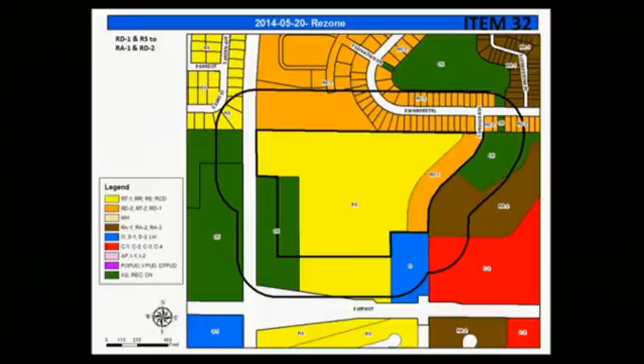Good evening, I'm Mike Cooper with City Planning and Building Services. This item tonight is brought to us by Brady Hyde, representing Whisper Ridge South Development as the applicant. The property is located on the north side of East 69th Street and west of Southeastern Avenue. The site is approximately 26 acres in size. The purpose of the rezoning is to construct a combination of multifamily, townhomes, and twin homes on this property. This is actually an update of current zoning that was approved in about 2005 by a previous owner of this property. Recently, the City Council approved zoning along the north side of 69th Street for a multifamily development. As part of that discussion, we brought in this property owner to make sure that these zoning changes and land use developments were being done concurrently.

Tonight we have a recommendation for you that came from the Planning Commission hearing. As we've discussed this with the applicant, we had some good input, not only at the Planning Commission meeting, but also with city staff from existing twin home owners on the north side of this proposed rezoning. We have a good representation here tonight of those folks. If I could summarize the issues we've talked with those neighbors about, that we've tried to address with this proposed rezoning: number one was concern about families coming into this new development area with a higher density, that there may be a need for a separate playground area, and the developer has agreed to provide a playground development as part of their proposed rezoning.

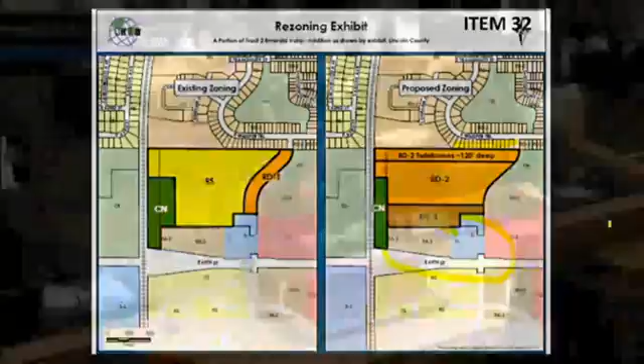My name is Rosemary Murphy, and I'm a homeowner at Whisper Ridge. I know you all have a tough job here tonight, and I do appreciate your service. But please keep in mind the homeowners of Whisper Ridge in making your decision tonight. We all made decisions to purchase our homes based on the current zoning at the time, which was single-family homes and twin homes. We all made our decision to do that based on the zoning at the time of the property that was adjacent to our property. So I just want you to keep that in mind.

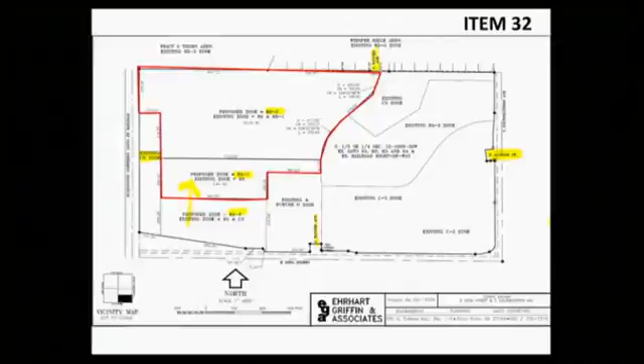Okay, thank you. Councilor Erickson. Sorry, one last little question. I think we need a little map or something. The RD2, I know you told Councilor Jameson what it could be, what his plan is to be for that development. What else could it be? His plan is to do this, but as we know, things change. So what else could it potentially be? The RD2 would allow up to a maximum of 8-unit townhomes, up to 8-unit townhome buildings. Thank you, I ask every time because I can't keep it all straight. Good question.

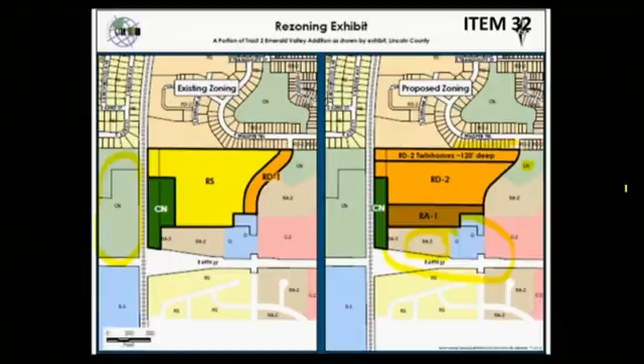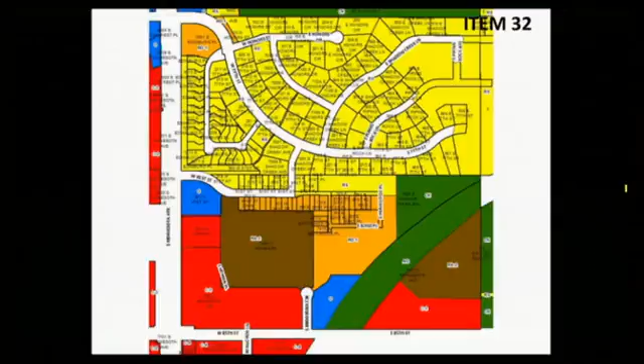Would anybody be willing to make a motion? Move to approve, Erpenbach. I'll second, Rolfing. Councilor Erpenbach has made a motion to approve this item, second by Councilor Rolfing. There's been really good discussion, good questions. A roll call vote, please. Councilmember Staggers? Yes. Anderson? Yes. Erickson? Yes. Erpenbach? Yes. Jameson? Yes. Karski? Yes. Kiley? Yes. Rolfing? Yes. That passed 8-0.

Thank you. Item 33. Item 33 is a second reading, an ordinance of the City of Sioux Falls, South Dakota, amending the Code of Ordinances of the city by revising planning and zoning application fees. Planning Commission recommends approval. Tonight we have 2 ordinance requests being brought to you by city staff, looking at updating some of our fees. The first ordinance is the zoning division. A number of these fees have not been increased since the 1990s, and there's a couple new ones that we're asking to be put in place. One of the big ones that we deal with are temporary signs, or portable signs. We're asking that fee to be increased by $5 to $25. Floodplain development variances, we have tried to be very restrictive on floodplain variances, but when they do come to us, there's a number of engineering requirements.

We have been working with FEMA to try to limit as much as possible floodplain variances. So we're putting a big number on there to really discourage those, and if it can be justified with engineering requirements, and if it can meet FEMA requirements, then we would consider it.

The manufactured home placement trip charge is similar to what we have in our building code. When we do an inspection for a mobile home placement and it doesn't meet the requirements, we have to come back for a second or third trip. It's just another fee we'd like to add to discourage that, to encourage compliance the first time around. We have a fee like that now for our building code inspection.

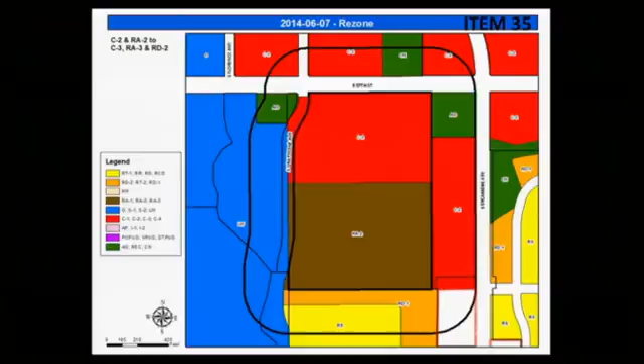Item 35 is a second reading of an ordinance of the City of Sioux Falls, South Dakota, rezoning property at the southwest corner of East 57th Street and South Sycamore Avenue from C2 Commercial Neighborhood and Streetcar and RA2 Apartment Residential moderate density districts to C3 Commercial Community, RA3 Apartment Residential high density, and RD2 Townhome Residential Suburban districts, petition number 2014-06-07, amending the official zoning map of the City of Sioux Falls. Planning Commission recommends approval. The applicant is Joel Dykstra, representing RMB Associates.

This property is located on the southwest corner of East 57th Street and South Sycamore Avenue, approximately 36.5 acres in size. The applicant is asking the council to update the current zoning that was put in place fairly recently, based on this southeast growing area, since the market for residential and non-residential is changing from what it was even a few years ago.

So here's a side-by-side comparison, and I'll take us through this zoning terminology. The C2 commercial allows up to 25,000 square foot buildings maximum. The C3 would allow up to 75,000 square foot commercial buildings maximum. The RA3 provides for 3-story apartment buildings that can be greater than 48 units per building. And the RD2 provides for townhomes.

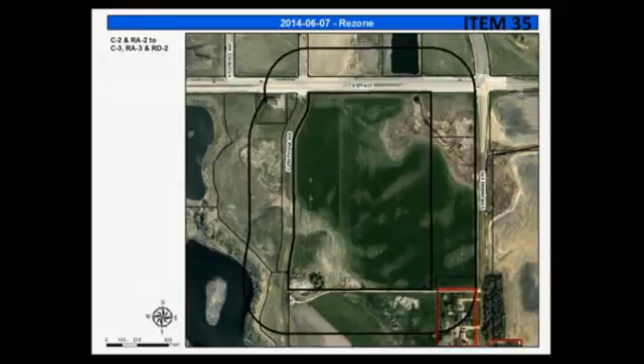Councilor Jameson: Mike, I think this is a great plan. I move for approval. Second, Karski. Councilor Jameson has made a motion to approve this item, seconded by Councilor Karski.

A roll call vote, please. Councilmember Staggers? Yes. Anderson? Yes. Erickson? Erpenbach? Yes. Jameson? Yes. Karski? Yes. Kiley? Yes. Rolfing? Yes. That is passed 8-0.

Item 36. Item 36 is a second reading, an ordinance of the City of Sioux Falls, South Dakota, rezoning property at the southeast corner of West 85th Street and South Tallgrass Avenue from the AG Agricultural District to the C2 Commercial, Neighborhood and Streetcar C3 Commercial, Community O Office, RA3 Apartment Residential, High Density, and RD Townhome Residential, Suburban Districts, petition number 2014-66, and amending the official zoning map of the City of Sioux Falls.

Planning Commission recommends approval. This item is also Joel Dykstra, applicant, RMB Associates. This is located in the southeast corner of West 85th and South Tallgrass Avenue. The site is 64 acres. This was recently annexed into the city, approved by City Council, and now we're rezoning it for the first time from agricultural to proposed residential and non-residential uses.

This is a very similar development plan to the one that we just looked at. In the corners would be the C3 and C2 commercial. In the middle is going to be office. We've been working with the applicant to use our shape places ordinance and look more at the lifestyle center with the higher density uses that would serve this growing neighborhood. And then the RA3 again would be the higher density multifamily, with the twin homes along that east side adjacent to the existing low density residential.

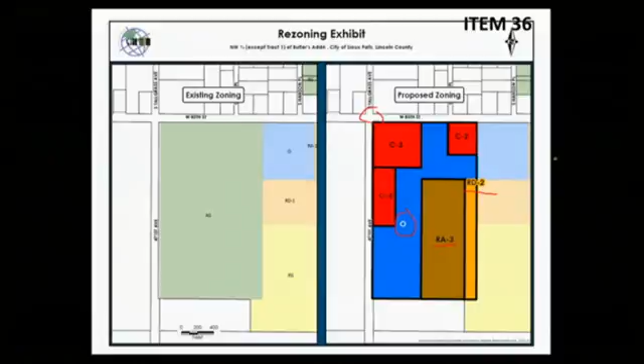Staggers? Yes. Anderson? Yes. Erickson? Yes. Erpenbach? Yes. Jameson? Yes. Karski? Kiley? Yes. Rolfing? Yes. That is passed 8-0.

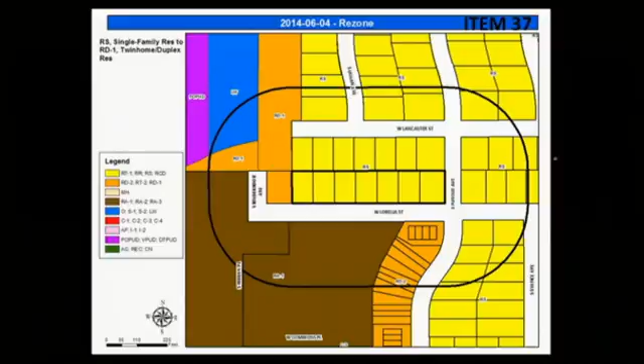Item 37, please. Item 37 is a second reading of an ordinance of the City of Sioux Falls, South Dakota rezoning property at the northwest corner of South Purdue Avenue and West Lobelia Street from the RA Single Family Residential Suburban District to the RD1 Twin Home Duplex Residential Suburban District, petition number 2014-06-04, and amending the official zoning map of the City of Sioux Falls. Planning Commission recommends approval. The applicant for this item is Brady Hyde with Empire Homes.

This is just under 3 acres in size. The property has been subdivided into lots, and the applicant is proposing to rezone this for twin homes. There'll be 7 twin homes on this site. Under the previous zoning ordinance, they would have to come back through for a conditional use. So again, that's one of the Shape Places benefits, is that we're zoning it, so now we know how that's going to be developed, rather than having to go through the conditional use process each time.

Thanks, Mike. Would anybody want to speak to this item? Council? Move for approval, Anderson. I'll second, Rolfing. Thank you, Councilors. Councilor Anderson Jr. has made that motion, seconded by Councilor Rolfing. A roll call vote, please.

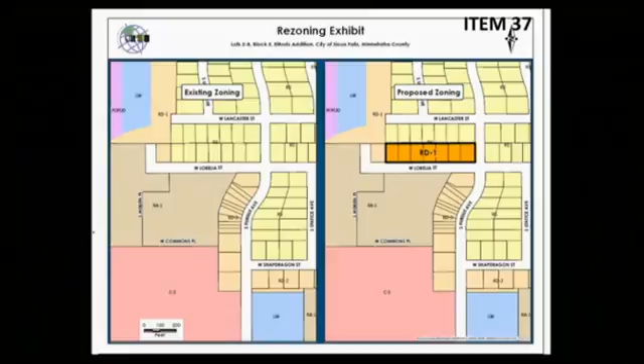Councilmember Staggers? Yes. Anderson? Yes. Erickson? Yes. Erpenbach? Yes. Jameson? Yes. Karski? Yes. Kiley? Yes. Rolfing? Yes. That is passed 8-0.

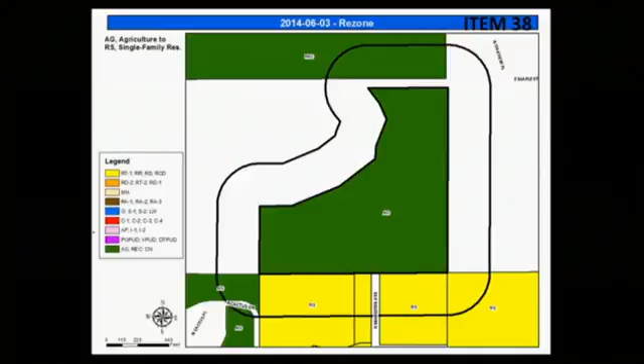Item 38. Item 38 is a second reading of an ordinance of the City of Sioux Falls, South Dakota rezoning property east and west of North Marlow Avenue and north of East Fairway Drive from the AG Agricultural District to the RS Single Family Residential Suburban District, petition number 2014-06-03, and amending the official zoning map of the City of Sioux Falls.

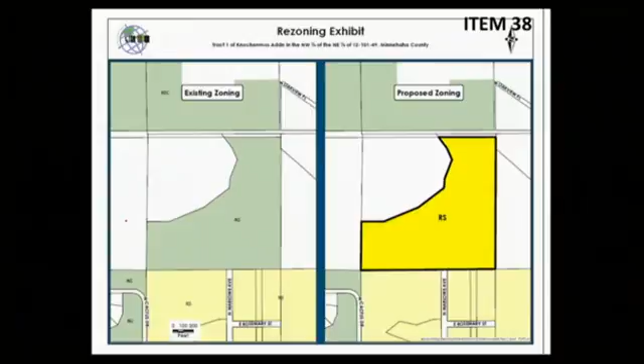Planning Commission recommends approval. The applicant for this item is Scott Gilbert and Pat Beckman. This is located northeast of Cactus Drive and west of Powderhouse Road, southeast of Great Bear Recreation Park area. The property is just over 26 acres in size, and the purpose of the rezoning is to construct single-family lots on 17 lots.

So the proposal is to construct 17 lots on the 26 acres of land. These will be large lots because of the topography. This is the way that the property lays out in terms of development feasibility. This was annexed by City Council action in May of this year, and so now we're going through the next step, which is the rezoning.

Through the Planning Commission hearing, two things that we've heard recently: one was concerns from the Cactus Heights neighborhood that there was going to be a connection from this subdivision over to Cactus Drive for secondary or emergency access. That will not be the case. The access to this Canterbury Heights development will be from Marlow Avenue, and then the fire marshal has approved a secondary emergency access that would go east over to Powderhouse Road. So that takes away the concern that this will connect to the Cactus Drive neighborhood. That will not be the case.

And then just today, we heard from residents to the south of this rezoning within the existing development that were concerned about what impact these 17 single-family lots were going to have on the traffic flow. If we can put the subdivision plan up there. This is the subdivision plan that was approved to the south of the rezoning. This was approved in about 2003, I believe. And at that time, it showed primarily single family, some townhomes.

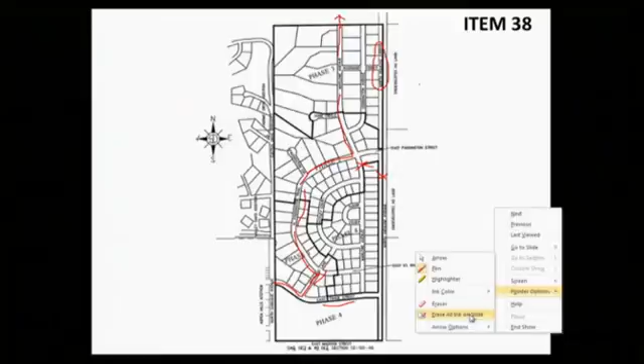So our question is, at what point do we actually get another emergency exit that is a viable exit, and at what point, how many more houses really have to be developed before we're going to have traffic flowing properly? So we think with this late notice, that approval of the development, from what we know about the rezoning—

We don't know of anything that we're not anti-development. We think that probably would be good, but we don't know anything about any reason to disapprove it. But we think the approval of it ought to be with conditions that there's an alternative route for all of this construction traffic, and the actual emergency exit, both out to either Madison or at least down to East Tahoe, so we can get safely out of there.

Todd, thank you very much.

Council, I let Todd go on quite a bit longer than normal, but I hope you understand, I think he was representing a group of homeowners.

Folks, anybody else want to speak on behalf of this topic? Welcome.

My name is Pat Beckman from Sioux Falls.

Mr. Miller was correct. I was originally involved in the development of the land to the south. That was property we were managing for some individuals, and since the economy went to pieces, they decided we weren't working hard enough selling lots, so they got somebody else involved. We have no ownership in that property, so there's little we can do about installing any streets.

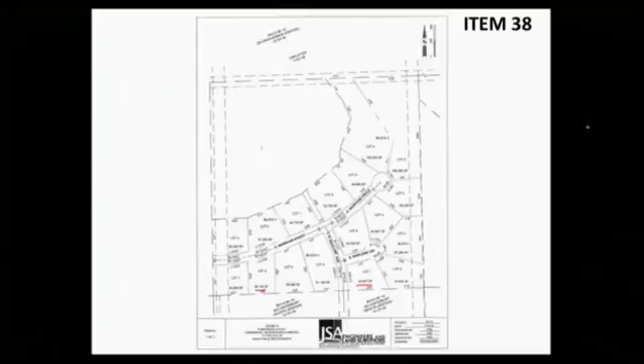Councilor Anderson Jr.: I guess I'm going to disagree. I've been in this area a lot, and basically it is still very much undeveloped. The roadways out there are not capable of handling the construction traffic and things like that. I think we still need to have some time to allow the neighbors to the south to work out details with this development. I still have major concerns about roadways in that area, and this is a planning issue, Mike. If we're going to be developing out here, we need a plan for that whole area, not just the development, but how we're going to move people in and out of there. My concern is also with the north section. Are there going to be any roadways up there? Is there any potential for roadways up there? That's what I want to hear, and I haven't heard any of that in both readings we've gone through on this.

And we do have that, and we can provide that to you. So,

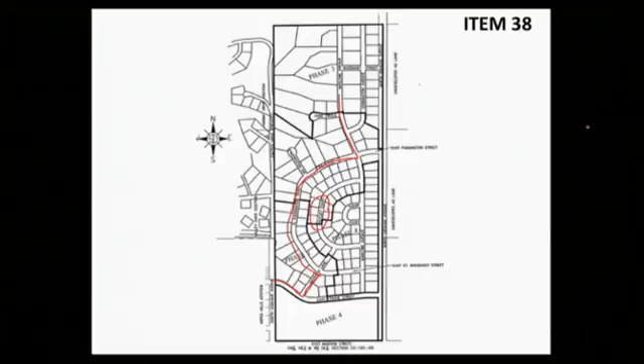Councilor Erickson: I'm going to offer a substitute motion, just so we're not delaying this until the 16th. I empathize with the homeowner, so my substitute motion is going to delay this until Tuesday, August 19th, to get the recommendation for those roads. We can get a plan in place. We're not delaying it too terribly long, so you can get your development moving along, but we can continue the conversation since this was kind of almost felt like it was sprung upon them. So I'd ask for you to support that. My motion is a substitute motion to delay the next second reading to Tuesday, August 19th.

I would second the substitute motion. David, can Councilor Erpenbach do that? Thank you, yes I can. Thank you. Again, thanks for coaching me.

Very good. We've got a substitute motion by Councilor Erickson, seconded by the original person, Councilor Erpenbach. So that's good, and no further discussion. A roll call vote, please, on the substitute motion.

Council, thank you. Councilmember Staggers? Yes. Anderson? Yes. Erickson? Yes. Erpenbach? Yes. Jameson? Yes. Karski? Kiley? Yes. Rolfing? Yes. That has passed 8-0.

So now I have a substitute motion that has been approved. Any further discussion? That's it? Oh, fantastic. The item has been deferred. Thank you so much, and neighbors, thank you. Pat, thank you. Item 39.

Mike Cooper, Planning and Building Services: As chairman of the City Naming Committee, we have two recommendations before you tonight. Item 42 is actually a renaming within the new event center. The City Council previously approved this space, on the west end of the suite level, as McNally's Premium Lounge. The request tonight is to change it to McNally's VIP Pub. Rick Hupfen, representing SMG, is here tonight if you have any more specific questions on this sponsorship.

Councilor Staggers: Yeah, when we approve this resolution, does the resolution just last as long as our contract with them, or is this 10 years, or what is it, Mike? The resolution would only be in effect as long as the contract is.

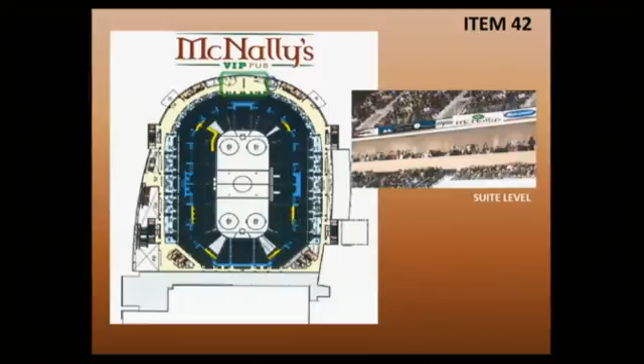Move for approval, Councilor Anderson. Second, Councilor Rolfing. They've made a motion to approve this resolution. A roll call vote, please.

Councilmember Staggers? Yes. Anderson? Erickson? Yes. Erpenbach? Jameson? Yes. Karski? Yes. Kiley? Yes. Rolfing? Yes. That is passed 8-0.

Item 43 is a resolution of the City of Sioux Falls, South Dakota, approving the naming of a facility space on public property: Comfort Zone.

This afternoon, we had another exciting announcement about another major sponsorship for the new event center. As a result, the naming request for what would be called the Comfort Zone will be on the west end of the main concourse. The sponsoring entities are Waterbury Heating and Cooling, Johnstone Supply, as well as Coleman Heating and Air Conditioning.

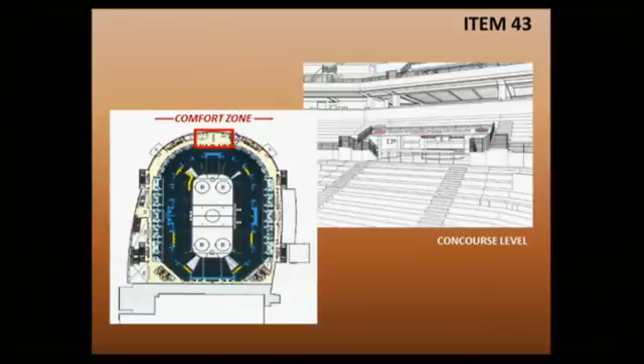Thank you, Mike. Council, any comments? Move for approval, Councilor Anderson. I'll second again. Councilor Rolfing. They've made a motion to approve this resolution.

A roll call vote, please. Council members Staggers? Yes. Anderson? Erickson? Yes. Erpenbach? Jameson? Yes. Karski? Yes. Kiley? Yes. Rolfing? Yes. That was 8-0.

Item 44 is the report of the July 29, 2014 Notice of Transfer of Appropriations within Major Organizational Units.

Folks, we started this meeting with a packed house, and we're now down to 5 folks, and we want to thank you for protecting us, for serving us, and for being very engaged citizens, because it's all we got left here. Council, I wanted to thank you too. For the people of Sioux Falls to know, these folks started as early as 3 o'clock officially, and it's now 9:30, so 6.5 hours later, they're getting ready to adjourn this meeting. They don't get paid a lot, not near enough, but they serve the public well.

With that in mind, Council, would anybody want to go home? I'll move to adjourn. Second. Councilor Karski has made a motion to adjourn this meeting, seconded by Councilor Rolfing. All those in favor say aye. Aye. Opposed? This meeting is adjourned.